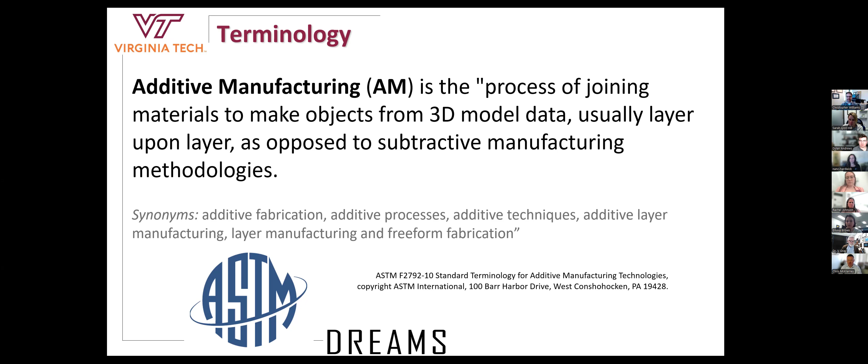And you'll notice the word additive is really critical here because it's to oppose it to subtractive manufacturing, the more conventional: I start with a giant chunk of metal and I'm going to mill or machine away. I'm going to subtract material to get to the shape I want. Whereas here, we're going to add material selectively to get to the shape that I want.

So again, in general, what all of these processes have in common is some three-dimensional model on your computer, a digital file, and we're going to slice that into layers and then lay down material layer by layer to build the object. And this is something we've been doing a long time in human history, actually, right? We've always been thinking about creating complex, contoured, three-dimensional shapes by slicing it into layers and then assembling them.

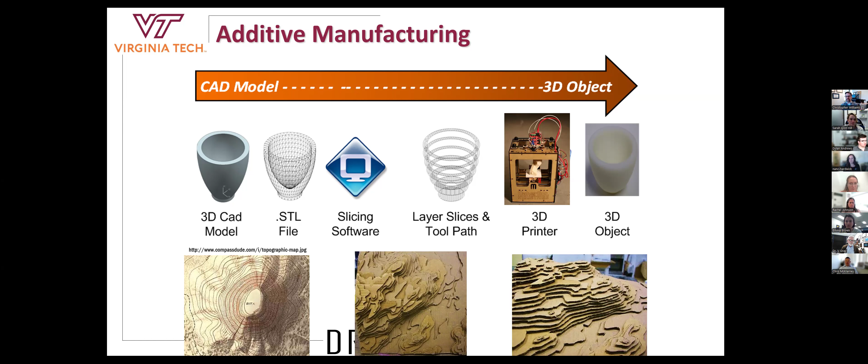So instead of doing the old cartography way, making contour maps, we've just basically replaced that with robots and shrunk the layers down to make them very fine, so we're able to create a really nice representation of three-dimensional shapes. So think about it in that context. So again, as I mentioned, we're all familiar maybe with this idea, right? I'm going to feed some plastic in through a nozzle, like a hot glue gun, and I'm going to build this object layer by layer.

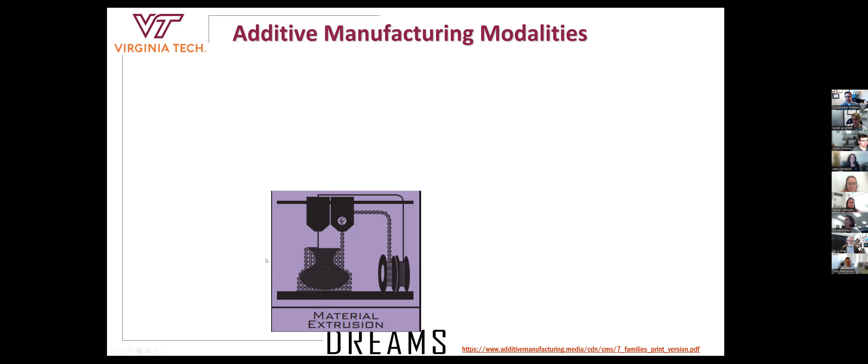But that's just one way. We call that technology material extrusion, right? I'm going to take some plastic and I'm going to extrude it selectively. And we should mention, by the way, that in that phrase, extrusion, there's a whole bunch of materials. We actually have a local company in town, Blacksburg, called Cell Inc., that uses that same principle, but it's printing biocompatible materials. Think about bioprinting, extruding biologically compatible materials that can be embedded in the human body. So there's lots of different ways of that idea of extrusion.

But what you might not know is that's just one of 7 different ways of printing. So very big classifications, and there's lots of companies and lots of materials inside each one of these. And again, they have in common that they are able to form objects layer by layer. Some of them are ink jetting processes. Some of them are actually using lasers to selectively melt powder. We have other technologies that use ultraviolet light to selectively cure resins layer by layer.

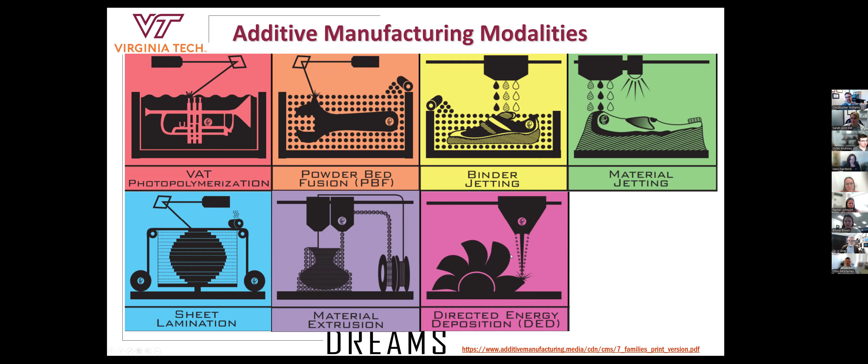And actually, another startup that we have in town uses this technology, vat photopolymerization. So Skyphos uses that technology to make very small, very precise, lab on a chip kind of devices. So this technology is not just about making Yodas about yay big, but they can make things very, very small. But because of our guests here, we're going to be focusing today a lot on directed energy deposition technology, which is about making metal components at very large scales very quickly.

So let me tell you a little about one quick other technology, just to give you an idea of other ways that we print: this idea of using lasers to selectively melt powder. And we have a technology like this on campus. And it's probably one of the most commercially adopted metal technologies.

This is a quick video of them using a laser to selectively melt metal powder. And you can sort of see that transition from a powder state to a molten state. And then when it's done scanning that layer, it will push powder across to recoat a layer on. And then they'll selectively scan again, and that will melt that area of the layer, but it melts into the previous layer.

And at the end, you're almost like an archaeologist. You have to dig through the powder to get your final part. And believe it or not, many of you have flown on commercial aircraft with some components made from this technology. Every SpaceX rocket that you've seen go to space uses printed engines.

We're seeing a lot of adoption, not just in aerospace, but even a lot of medical implants. Some of you might have friends who've had a spine implant or a knee implant that has been printed with this technology, right? So it's not just plastic trinkets, it's actually also high-end polymers and high-end materials, but also metal components.

So just to give you a flavor for other technologies. Again, as I mentioned, we're going to focus a lot today on directed energy deposition, which is this idea of directly adding material selectively. And one of the technologies we'll talk about is this opportunity. Imagine just taking a welder, attaching it to a robot, but instead of just doing one line of a weld, actually stacking the welds layer by layer and building big metal parts out of that.

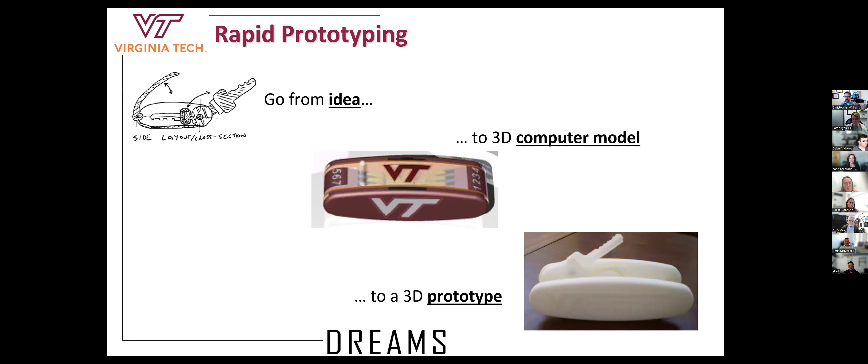So the original idea, and still a very big use of these technologies, is I have some sort of idea. I don't want to invest the time and money and tooling required to make that idea, but instead I want to go to a computer model and then hit print, right, and get a plastic version, a quick prototype, right? And it allows me to iterate through my ideas much quicker, or I can bring them to my customers and show them a model and say, yes, we all sign off on this idea. So it helps with communication aids as well. Again, a very great use of the technology.

But then what we're starting to see is people starting to do more functional uses of these systems. So one of the big ideas is maybe I still am going to use traditional manufacturing to make my product, but I have a lot of tricky operations. I have to do assembly, so I have to sort of jig and fixture everything in place, or I have to do very careful inspection. And I don't want to use my manufacturing tools to create these custom odd-shaped fixtures. I can use this technology to design and quickly make those kinds of jigs and fixtures to hold my parts in place during assembly or inspection, or to aid in traditional manufacturing. So that's another big use case we see in this industry.

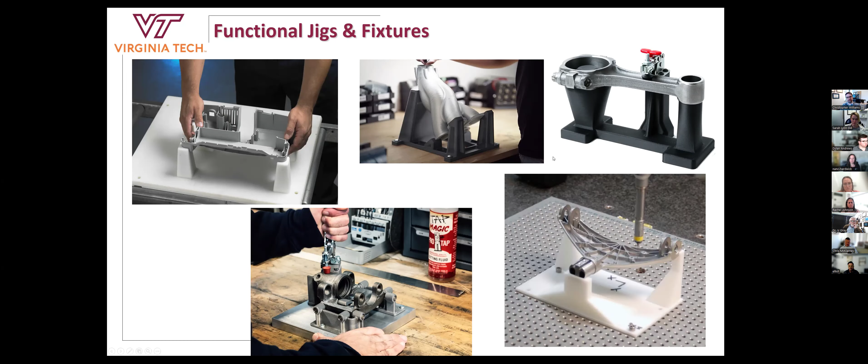And again, every single one of these is made with a different technology. Maybe some of them are made out of metal, some of them are made of polymer, some of them are made out of composites. Each one has its own pros and cons, and that's something we as a community can work together to help with.

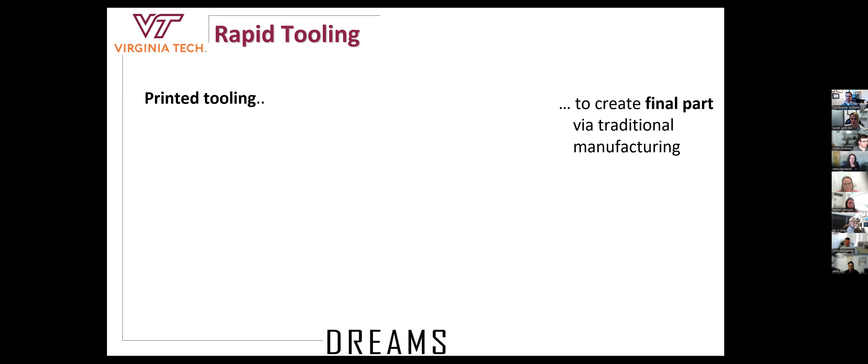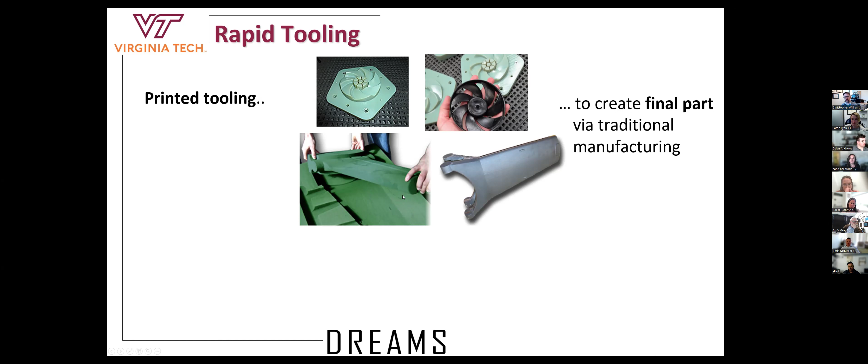The other sort of evolution of the technology is what we refer to as rapid tooling, where we're going to actually print a tool and then use that in traditional manufacturing to make the part. So we're not making the part, we're just making the tooling and fixturing to finish that. So we might be able to make, for example, a short run injection mold using a polymer additive manufacturing process. So we're just making the mold and then inject plastic to make the final part. There are even technologies that allow you to directly print sand and use it in traditional sand casting. If you don't want to make the patterns and tools, you actually can print the mold directly.

And there are even large-scale polymer additive manufacturing technologies that are being used to print very, very large molds, like this wind turbine blade mold, that they can then use to do conventional carbon fiber or glass fiber layup to make wind turbine blades or other very large-scale aerostructures. So additive manufacturing is not just something that fits on your desk, it's something that fits in half your factory, right? It's very large systems that allow for the manufacture of very large objects.

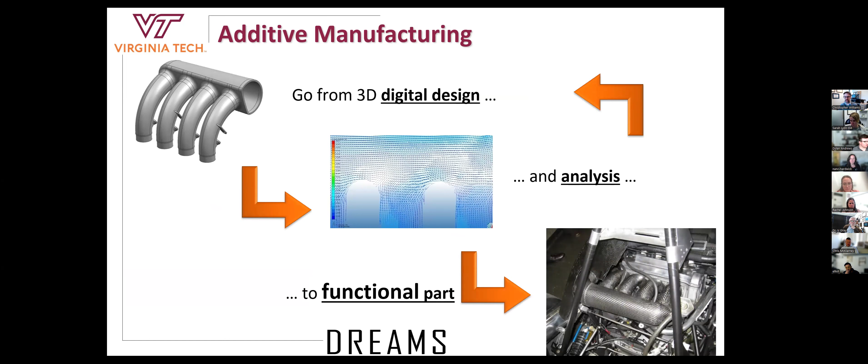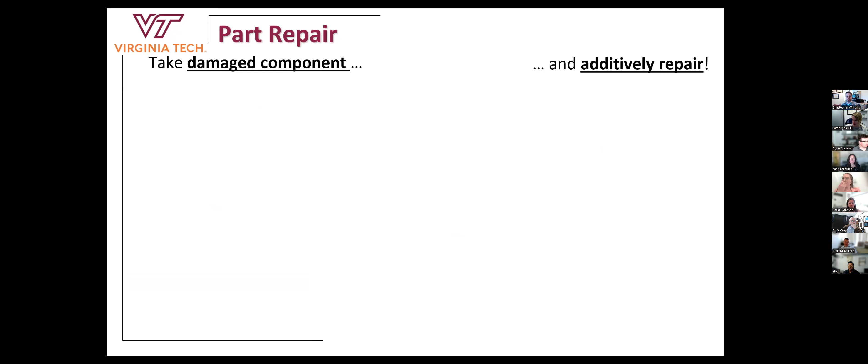The last thing that might surprise you is that these technologies, specifically these directed energy deposition technologies, are really unique in that they're also able to repair parts. So it's not just about making an object from nothing. You could actually bring an existing object into your printer and deposit material to repair holes or other damage.

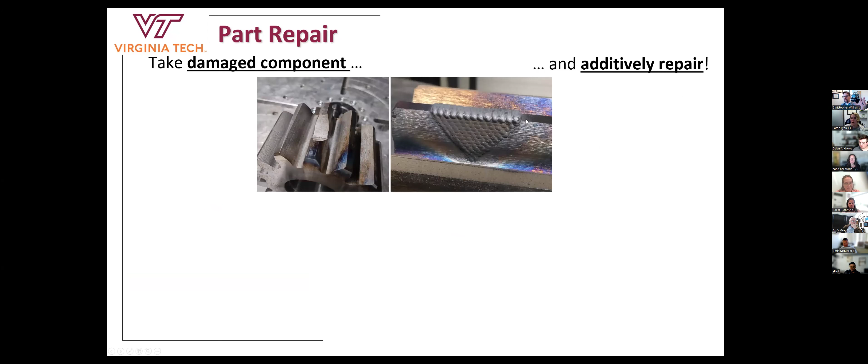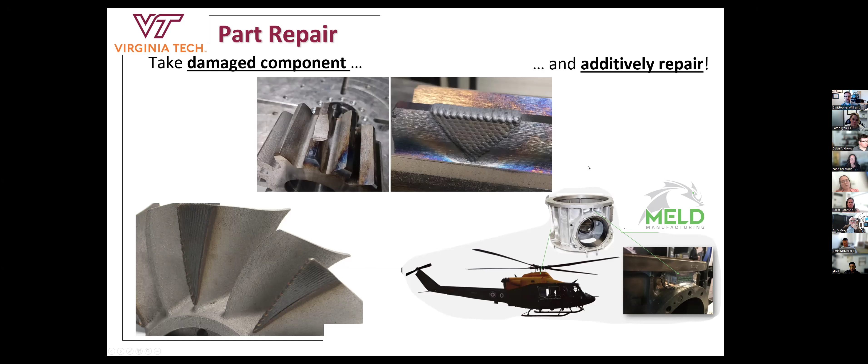So for example, I might have this toothed gear here, and I can actually go in with a directed energy deposition system and selectively weld in and add material, and then take it to my machine shop to remove material. Or again, re-tip turbine blades, for another example. And maybe Nanci will share some of her company's work in repairing aircraft components that otherwise, with that damage, would have to be thrown away and started from scratch. And here we're able to just directly use that technology to add material.

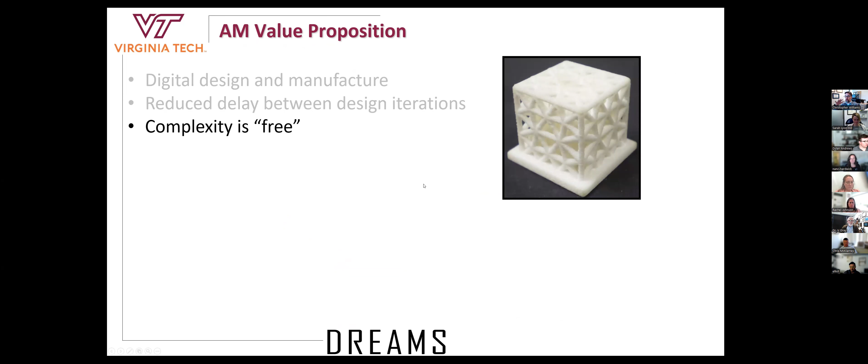So what are the value propositions? I think this is a good opportunity to let Nanci and Alan, so I'll just run through these. The bottom line here is we have an opportunity with this technology to digitally design and manufacture objects, which allows us to reduce the delays between new ideas. Complexity is not necessarily free, but we're able to make much more complex and lightweight components than traditional manufacturing processes allow, because we're able to grow parts and not have to reach in and subtract and mill away.

We're able to make lots of parts in a single print that are all unique. And some of your friends might have custom-made hearing aids. Almost all the hearing aids now in production are 3D printed, right? Because each ear canal is unique. Some of you might have the Invisalign orthodontics. Those are also printed components.

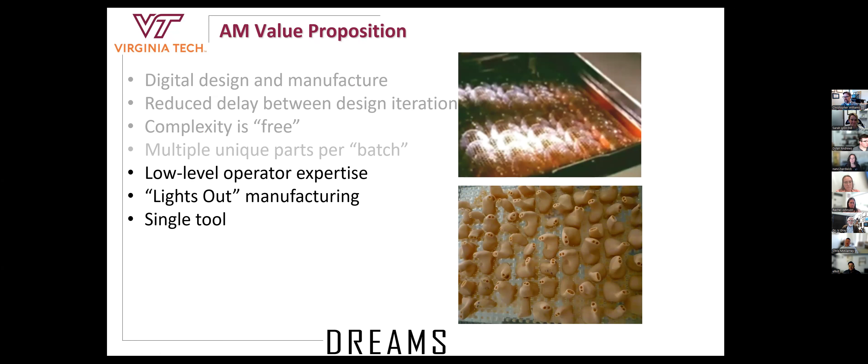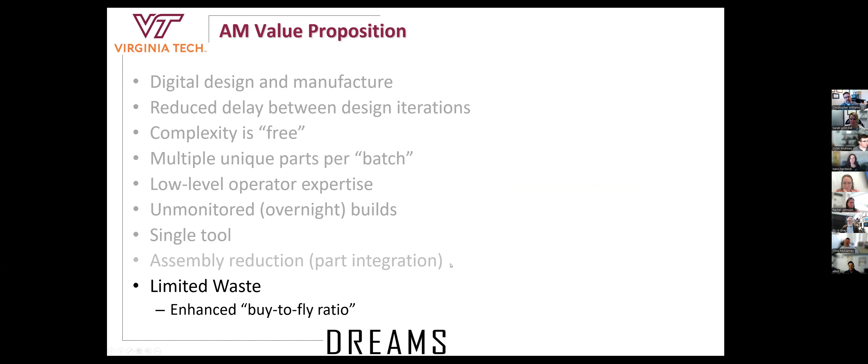And this idea that we don't have to delay manufacturing, it's very agile. We have a single tool to make almost any shape, and that saves a lot in production time and training. And one of the really nice things, it also reduces assembly, because that complexity allows us to make a single part where maybe we had to make several components and then assemble them together. And one of the things that we're excited about is limited waste.

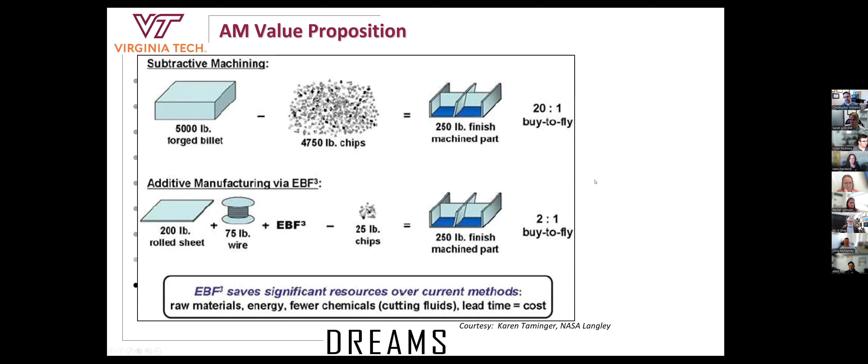So, if I were to take a traditional part that I would like to achieve, this part over here, traditionally I would take a giant block of metal and waste almost a 20-to-1 ratio of the raw materials on the floor to get to the shape I want. Whereas in additive, we're able to get a much better buy-to-fly ratio, meaning the amount of material I purchase actually ends up on the part instead of just waste on the floor.

And I think what you're going to hear from Alan and Nanci is that what we're really seeing right now, especially in the world of large-scale metal additive manufacturing, is that there's a lot of demand for large parts that are traditionally made through castings and forgings, and there's a huge supply chain limitation there. And now their technologies are providing answers to address that.

So with that, I'm going to skip my last slides and just pass on to, I'm going to keep calling them our assets, our key partners in our region who are really leading the industry with their representative technologies and services. So we're really fortunate to have Nanci Hardwick, who's the CEO of MELD Manufacturing, which is what we would call an original equipment manufacturer, someone who actually manufactures manufacturing machines.

And we have Alan Pearce, who's CEO of FasTech, which is located in Danville. And they use existing machines to provide a service and actually design, fabricate and qualify parts and large-scale metal components. So with that, Nanci, I'd like to invite you to jump in here and tell us a little bit more about MELD and what you all are up to.

Okay, thank you very much. Let me share my screen here.

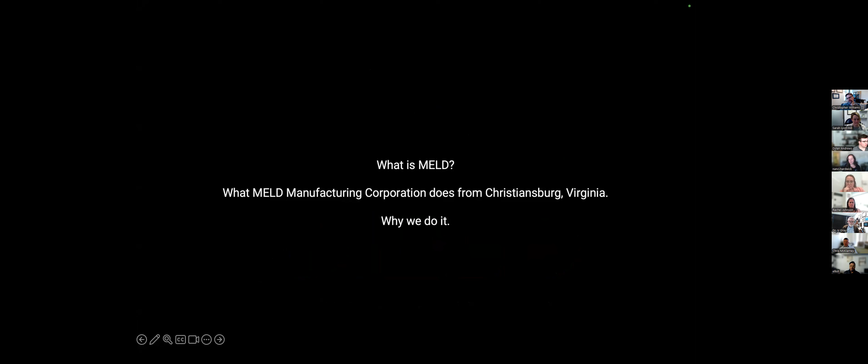I think that was a great overview. I would echo that there is a ton of variety in that additive manufacturing space. Like any manufacturing challenge, there are many tools to choose from to solve the problem at hand. The same is true in 3D printing or AM technologies. So MELD is certainly one route for AM, but there are many, and they all have advantages and unique attributes that make them appropriate for certain products. So I would be really excited to tell you about my company, MELD Manufacturing Corporation, headquartered in Christiansburg, Virginia.

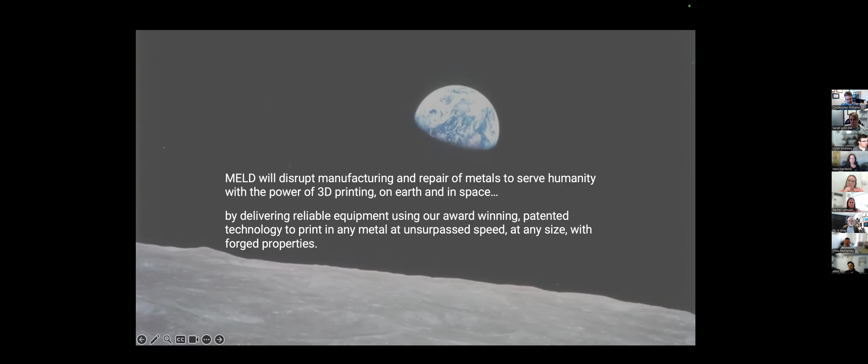Tell you about the MELD technology and why we're doing what we're doing. So let's start with the why. It is our mission to disrupt the manufacturing and repair of metals to serve humanity with the power of 3D printing, both here on Earth and in space. As Chris mentioned, we are an equipment manufacturer, so we will do this by delivering equipment using our award-winning patented technology. That technology is meant to print any metal at unsurpassed speeds, meaning very high rates, at any size with forged properties. So that's our unique value proposition.

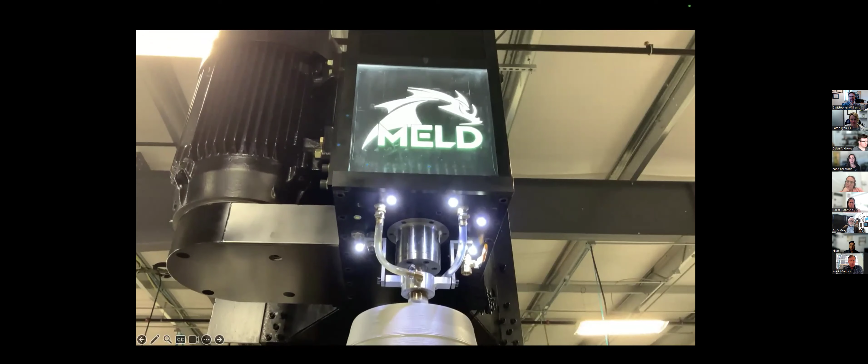I minimized the videos in this presentation in case we had some trouble with internet speeds, but I wanted to show you a part right out of the gate. This is being printed on a MELD machine here in our facility. And in case that didn't come through or you're wondering how big was that, here's me with that part. This is about 20 hours of printing and almost 300 pounds of aluminum.

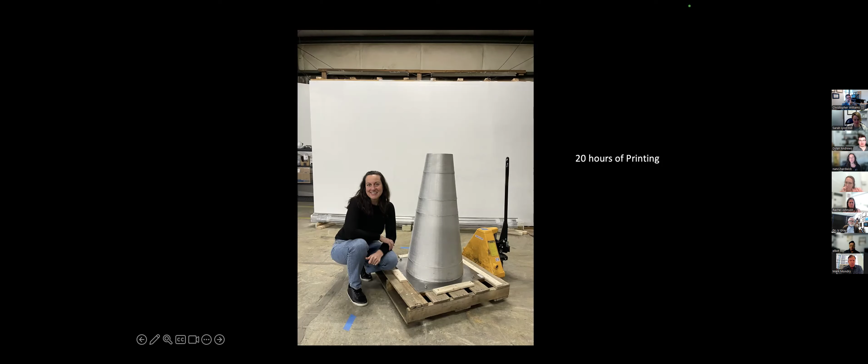I think this is a great example part to show you, to give you a sense of what MELD is capable of. We're specifically having a tremendous amount of pull from industry for large metal components that previously were manufactured from forgings. You have probably seen some of these headlines yourself, but all around the world, innovators and manufacturers are having challenges getting large components in a raw form to be able to make their products. Large metal parts, as Chris mentioned, usually come from a big block of metal that then has to be machined out, and sometimes 80% or 90% of the metal is being machined away to get to the final geometry.

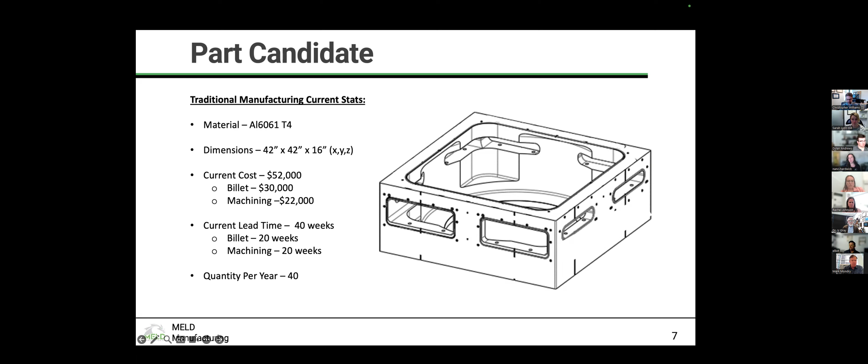This is the advantage that you will see over and over again with 3D printing. It won't always be cheaper. It is a new technology, and new technologies have a cost to them. But there are opportunities to not only save material, not only save time, but save money as well.

So what is unique about MELD? There are a few things. The technology that we have created has some unique attributes that let us print in materials that are not otherwise printable with other 3D printing technologies. We have a lot of activity in aluminum alloys. Magnesium alloys are another material that I don't think is otherwise printable. Copper, titanium—these are the materials that we have the most pull for.

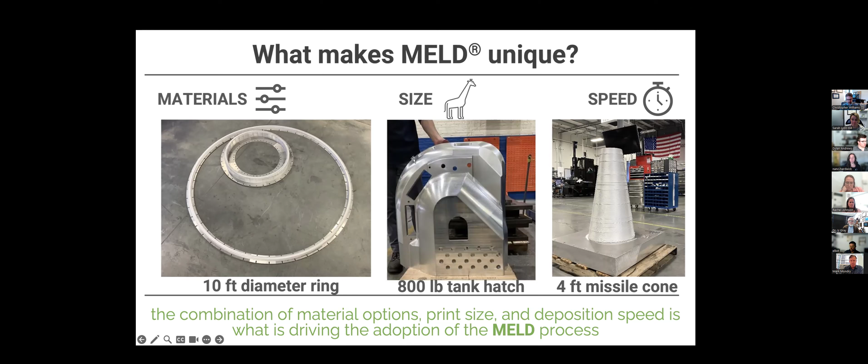The size, as you can see, there's really no limit on scale, and the speed by which we can make these parts is quite high. We have a very high deposition rate. Hopefully you can see this printing and you can tell that we're printing in just an open air environment. Because we don't have to be in a chamber, we have the ability to scale up the equipment and thus make parts that are as big as the equipment can facilitate.

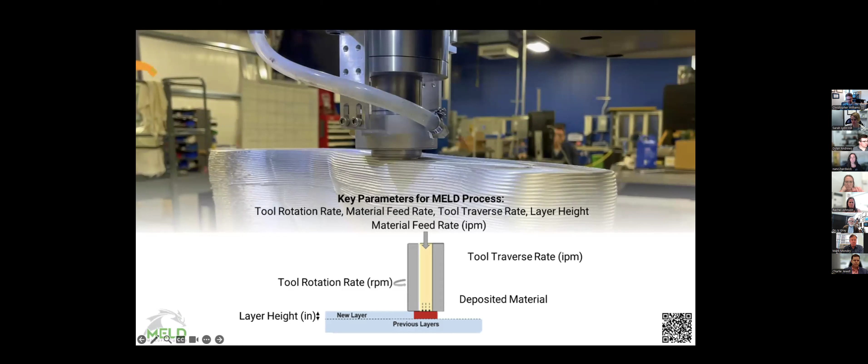There's a little bit of explanation of our process on this slide. What we're showing is the use of solid metal bars going through the machine. You can see the rotation, and we also use force to put enough energy into the material to get it to plastically deform, but we are staying below the melt temperature. This has some other benefits as well. This is essentially how we're getting to forged properties and usable material right out of the machine.

As I mentioned, this is very unique. We have over 24 patents in the US and worldwide, and I'm very proud to say that this technology was invented in Virginia, in your hometown.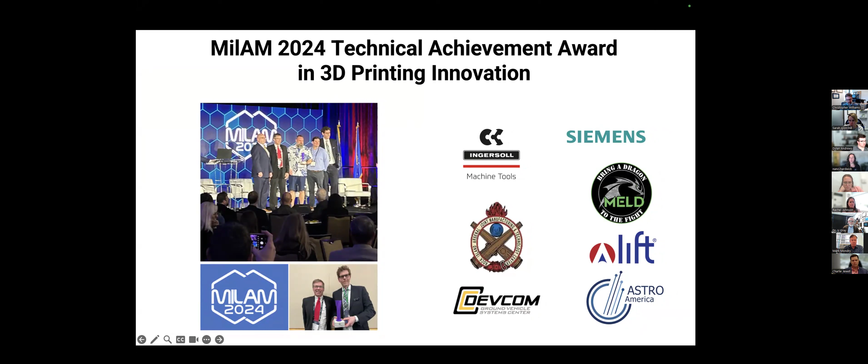We've received a lot of recognition for this technology, with a number of awards, both international and national. Just this year, we won an award at the Military Additive Manufacturing Summit for technical achievement with our partners in the U.S. Army, as well as other partners listed on this slide, for what we all believe is the creation of the world's largest 3D printer in metal, which I'll show you in just a moment.

As he said, we are an OEM. We manufacture equipment, and these are some of the machines that we offer from our facility in Christiansburg. Just to give you a sense of scale, this is our smallest machine. So you are looking at a 3D printer in this slide.

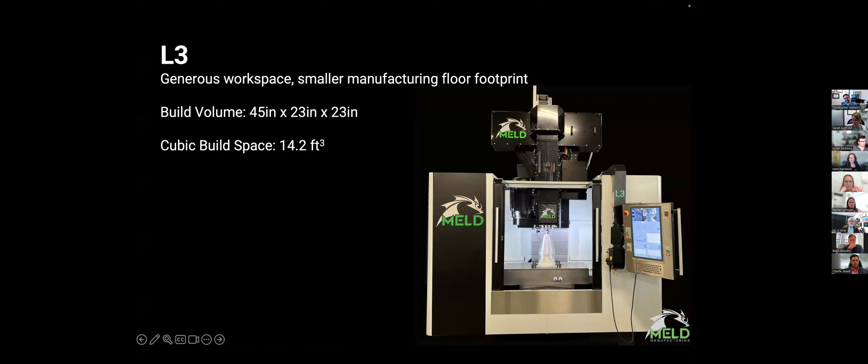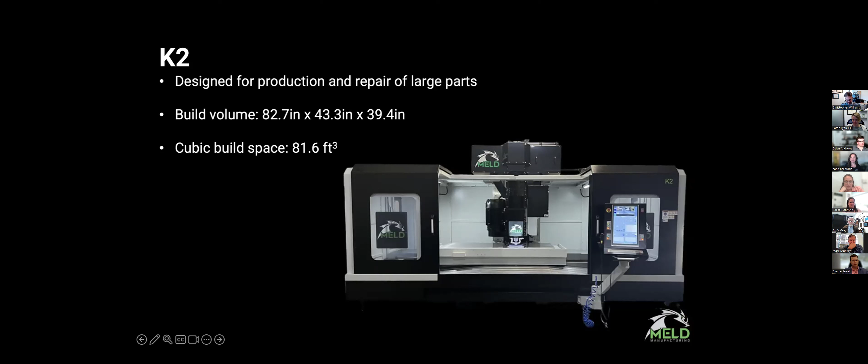And Thursday, when you come to visit, you'll be able to see this printer in action. Our L3 model—I did name my machines after droids in the Star Wars series for Star Wars fans. K2 is a bit bigger, about twice as wide and a little taller, so you get a sense of being able to print larger components.

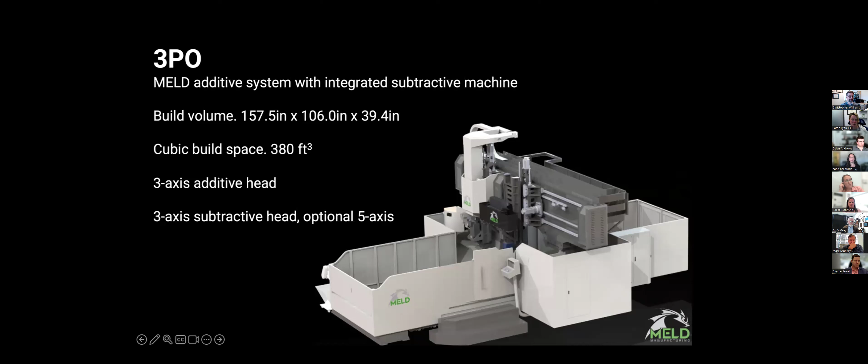And then 3PO is our first hybrid machine, meaning that the machine can both print a component and then mill or perform subtractive machining on that component. So you will be able to print and then machine down to your final geometry. This is a really large machine, the largest that we manufacture ourselves.

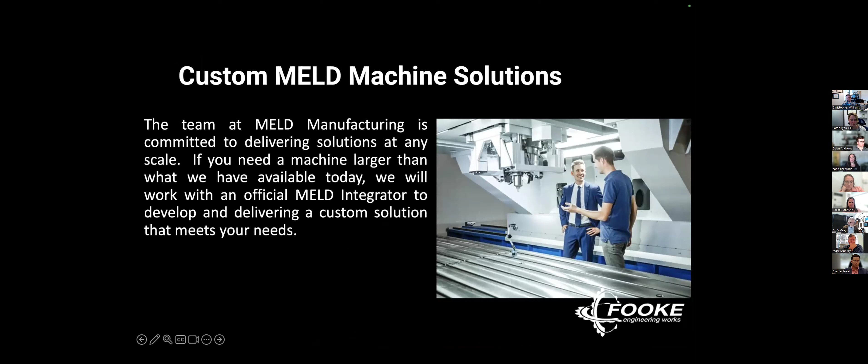However, we offer the MELD hardware as a retrofit, so that if you need a machine bigger than we can manufacture, you can work with a machine platform manufacturer to integrate the MELD equipment, which we just announced a relationship with Fooke in Germany for this purpose. So they will have a MELD product line of their own with much larger machines.

Another example of that is a machine now housed near Detroit and operated by SAE on behalf of the U.S. Army. This machine is a hybrid machine—it has MELD hardware for printing and a subtractive machining center. You can print and machine down to your final part geometry on this same machine.

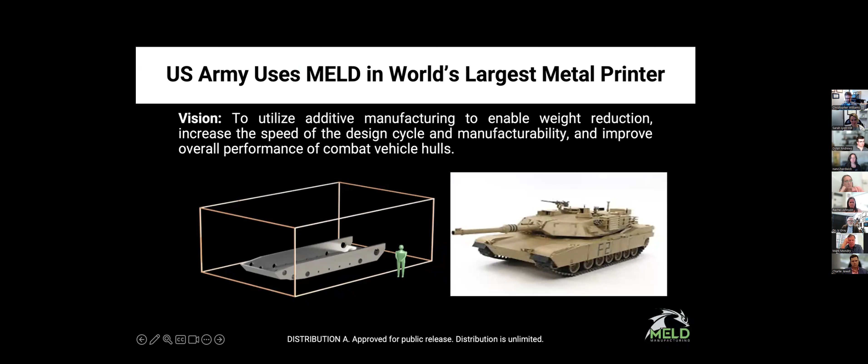Many people, the U.S. Army was the first group to put this in writing about the MELD technology, but it's something that I get to hear a lot.

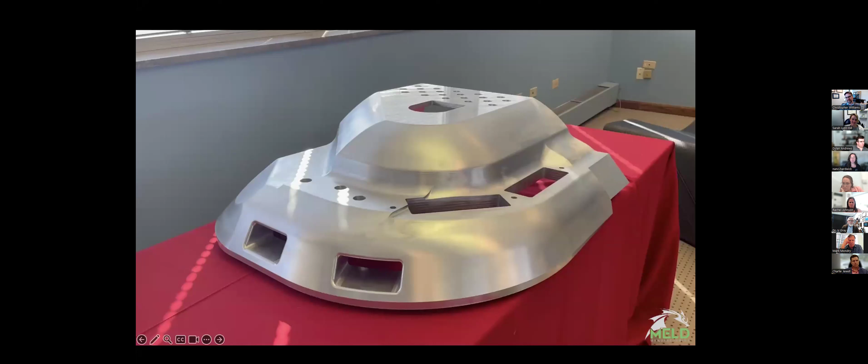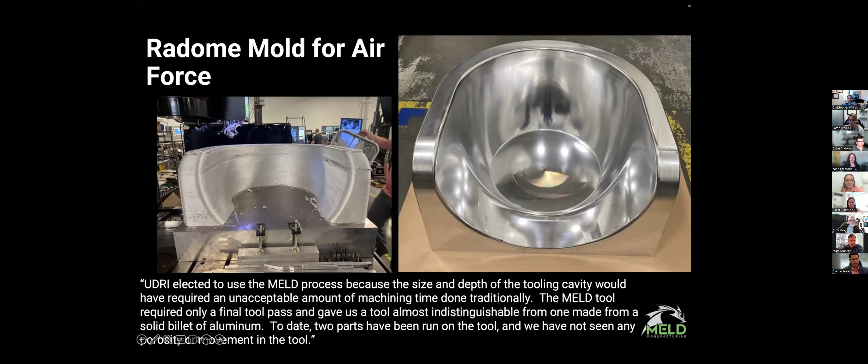I like showing this part because it shows a couple things. First, it's another example of a low rate need where time was critical. Second, you can tell the finished part came from two things: the printed material on the surface of a block of metal, and the block of metal itself. Normally this part would come from one giant block of metal, so this is a really easy way to conceptualize how we're saving material, and also how we're saving a tremendous amount of chip making or machining to get down to the final geometry.

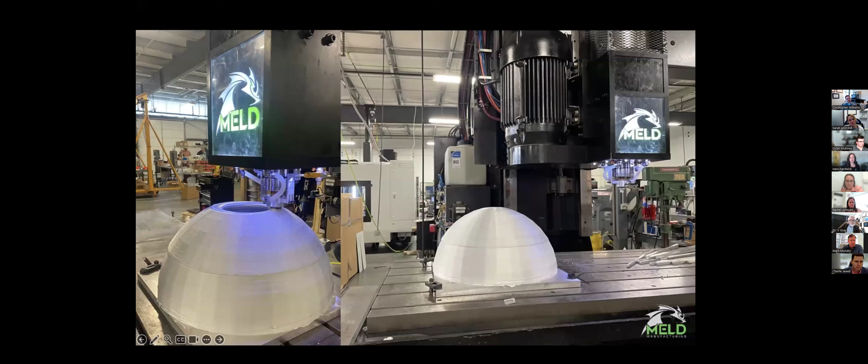We've been working with Boeing and our university partner in Tennessee on landing gear components. This is an exciting part because it's made from aluminum 7075, which is an unprintable material, except for the MELD technology. We've also been working with our space customers on components, pressure vessels and domes.

We have other activities for the Air Force, creating parts that are needed for maintenance and repair operations where there isn't an inventory and perhaps the original manufacturer doesn't exist anymore.

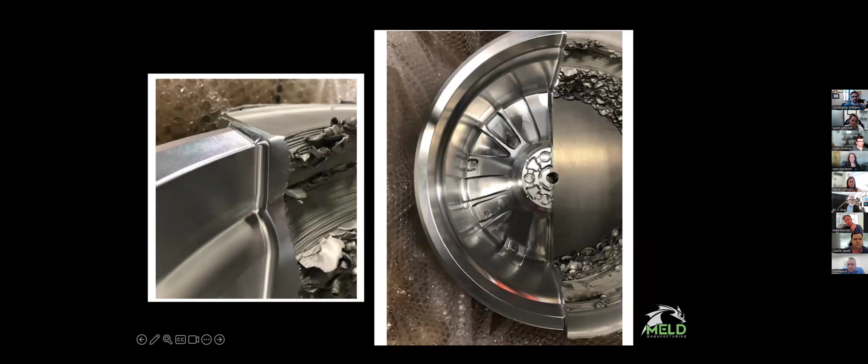I think another fun one here is for you to see how being able to use the plate that's printed on and the printed geometry can yield something very exciting. So at MELD, you'll see some fairly basic shapes being printed, but they turn into very exciting components.

Now we're looking top down at a half machined part. This is a wheel, and you can see the as-printed side on the right, and then what it looks like when the machine goes through a milling process or subtractive process to get to the final part geometry.

So a few examples without any videos of what parts look like, a very wide variety of industries coming to MELD for these parts. I showed you all 3D printed components, but Chris did mention repair.

I think it's a great way to contribute to sustainability by being able to replace, repair, recoat material in components that are worn or damaged. In the case of this magnesium gearbox housing, which is a flight critical component, there is a standard crack that occurs, and MELD was able to demonstrate that we can successfully remove the damaged material, print new material with sufficient bond strength to the part itself, and machine it to its original geometry and put it back in flight.

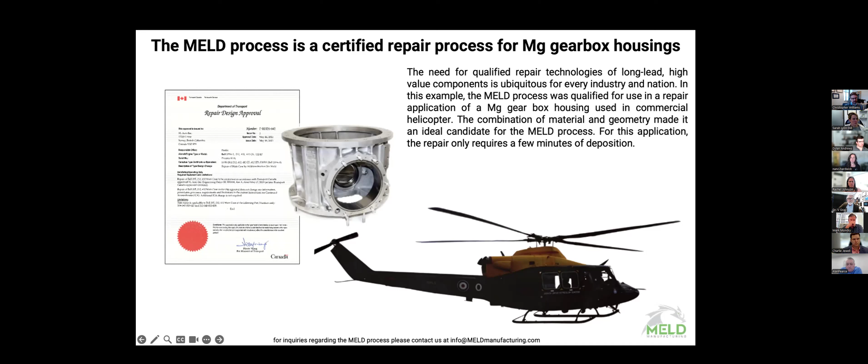I thought I would finish by just sharing some of the activities that we share with the next speaker and with Virginia Tech and others in the state of Virginia.

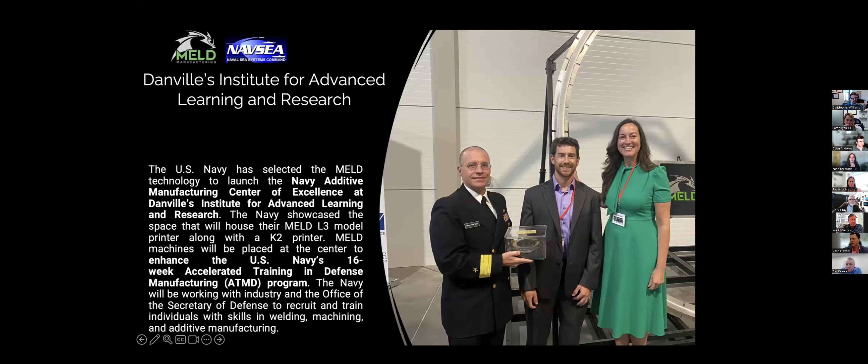We're very proud to be a part of the Navy's Center of Excellence for Additive Manufacturing in Danville, Virginia. This picture is from the ribbon cutting before there was any equipment there at all. Right behind us is a 10-foot diameter cylinder printed with the MELD technology.

We've been honored to be a part of not only providing parts for the Navy, but also for workforce development. It's a really great vision and a privilege to be a part of it.

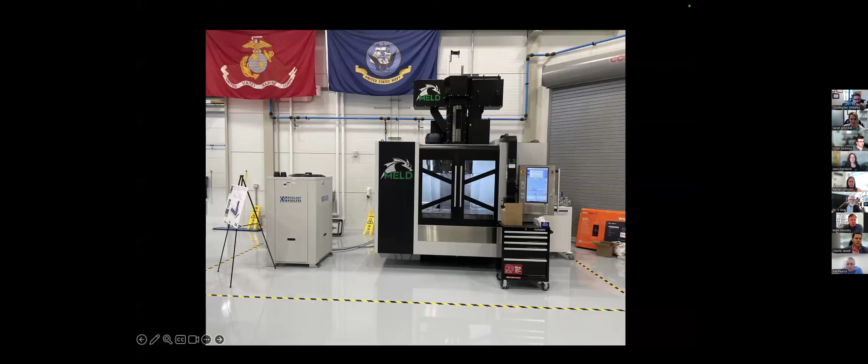Once the equipment got loaded, it looked like this. Then it was my pleasure to explain our technology to the U.S. Secretary of the Navy. So I think that's probably a great place to let Alan pick up, and I look forward to everything ahead for all of us. Thank you.

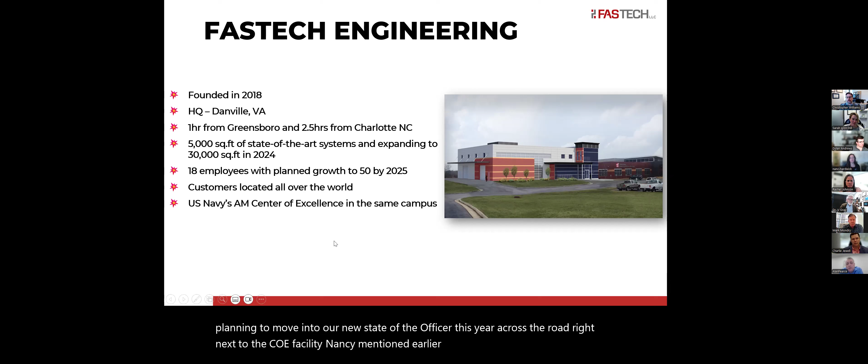So it's been a phenomenal investment, hundreds of millions into the region for training and additive manufacturing technology, investigation and expansion. For those that don't know, we're close to Greensboro and 2.5 hours from Charlotte. Our current facility is literally connected to the machining program in the cyber park in Danville. We currently employ 18 people, and our planned growth is to 50 by '25 - I think the rate's going to be more like 100. We're already planning to move into our new state-of-the-art facility across the road, right next to the COE facility Nanci mentioned earlier.

Our largest customer has become the DoD, really, between the Navy and the Army, but also a lot of aerospace clients. We're a service provider, so we use additive technology as part of a solution to print, machine, inspect, and test parts on behalf of the customer. We're a supplier that would buy, hopefully, for example, a MELD system for some of our clients and opportunities within the DoD arena. The customers we currently deal with - our largest was Siemens.

It was the first company we started with, down in Charlotte, manufacturing large gas turbine components for those guys. We also work with Collins on aerospace components, and Norfolk Space on solar power, Rolls-Royce engine parts, and so on. We just started moving into the space industry now as we've gained some traction with certain technologies.

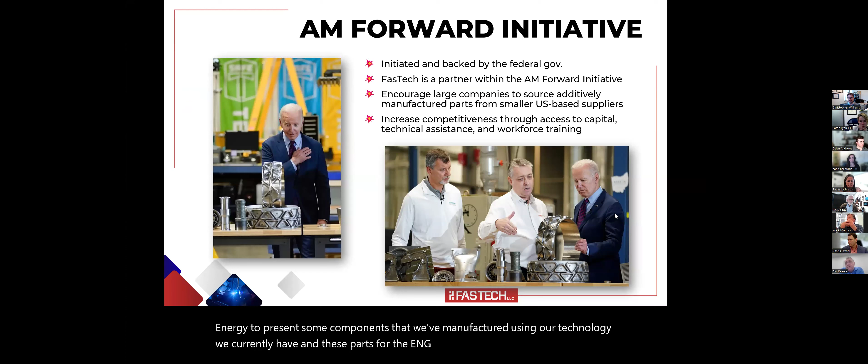That's something we're very proud of, and I think it's important for anyone that doesn't really know much about additive to understand that the federal government is behind additive manufacturing and created this AM Forward program about a year and a half ago. I was very lucky to be invited with the CEO of Siemens Energy to present some components we've manufactured using our current technology - parts for gas turbine engines.

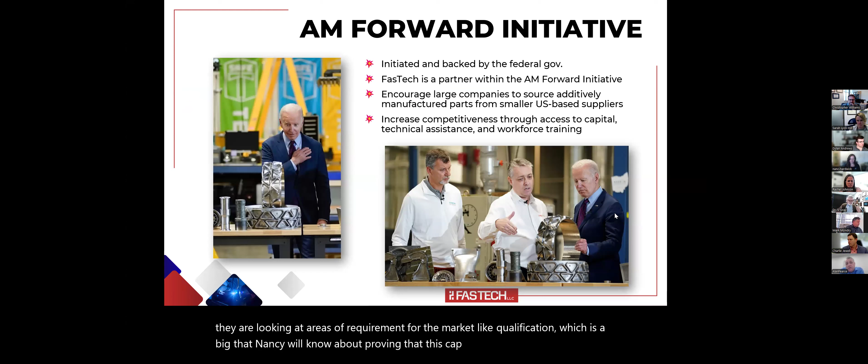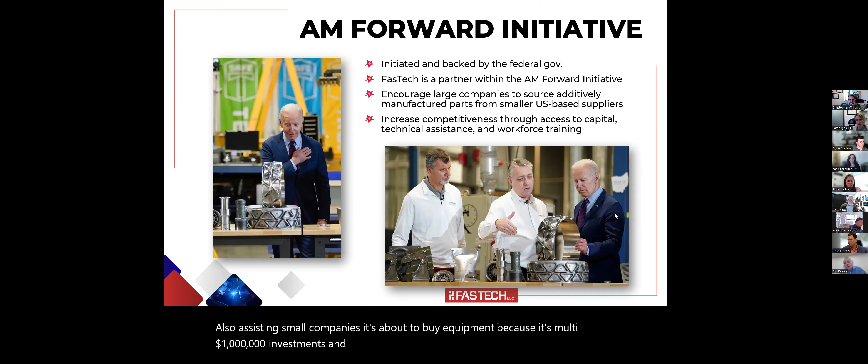The aim of the initiative is all about supporting small companies like ours to work with large companies like Siemens. They're looking at areas of requirement for the market, like qualification, which is a big headache that Nanci will know about - proving this manufacturing capability using this technology - and also assisting small companies to buy equipment, because these are multi-million-dollar investments. And the other big leg of the chair is training.

There's no point creating all this technology if no one's got the skill to actually make the parts. In Danville, the new facility for training additive welding, machining, and inspection of additive and other standard parts will create over 1,000 trainees within the next year who can come work for companies like ours and MELD, and obviously the supply chain that feeds into DoD.

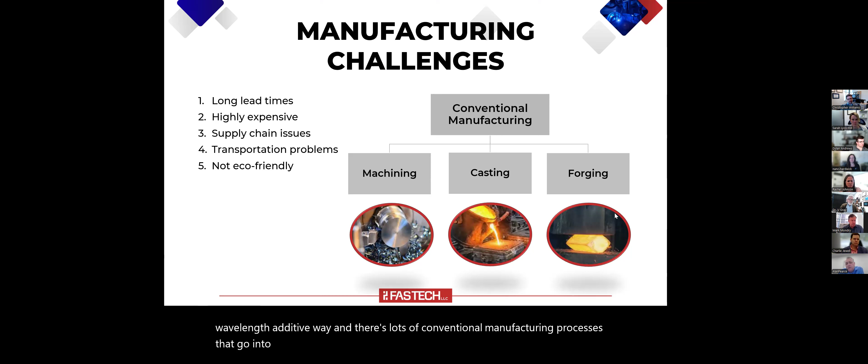We touched on earlier about the difference, and Chris did a good job covering that - so what's the difference between standard ways of making stuff and our additive way? There's lots of conventional manufacturing processes that go into making a component. If we look at this picture, you'll see all these different processes typically used to make a single part in a conventional process, and we take that down to three: using wire, a machine for actually printing, and a machine to maybe post-process or finish the part.

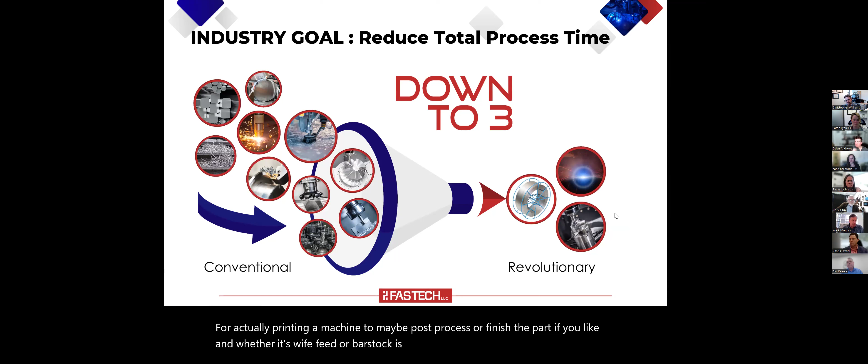Whether it's wire feed or bar stock as MELD use, the principle is it's easy to buy off-the-shelf material globally, and that makes such a difference to the supply chain issues that are common all over the world now, but particularly in the US as we start to reshore, which is good news.

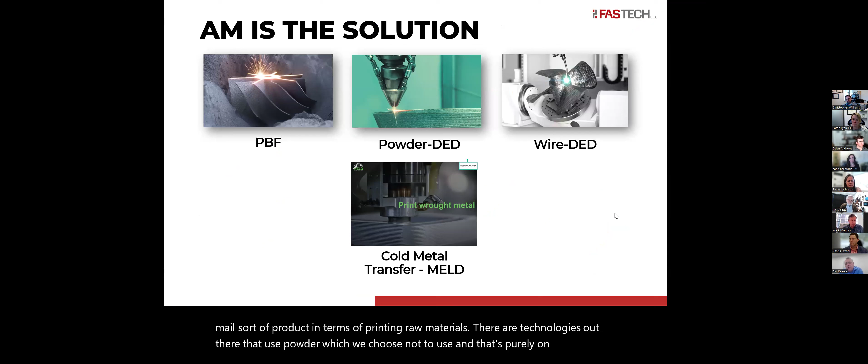The technologies we use are wire-based DED, and as you know, Nanci's covered the MELD sort of product in terms of printing raw materials. There are technologies out there that use powder, which we choose not to use, purely on the basis that we're looking to make big parts for industry, not small parts. This technology lends itself very well to that industry, such as MELD does, as Nanci showed us earlier.

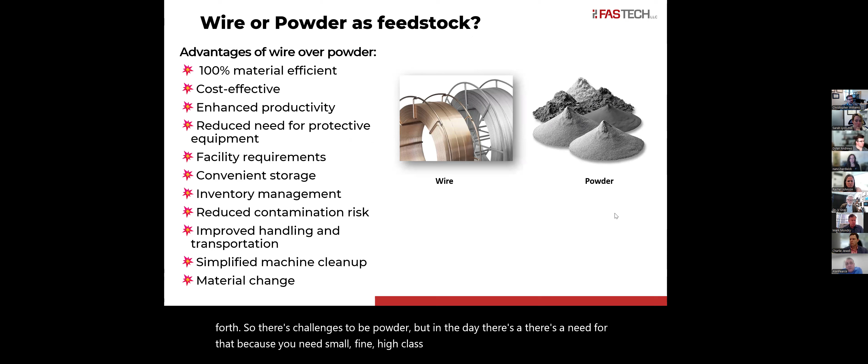So wire versus powder, why do we use wire? It's much more efficient, it's 100% efficient wire. Powder, in the process using powder, is sort of waste. There's a lot of ecological issues, and it's expensive. It reduces contamination risk and so on and so forth. So there's challenges with powder, but at the end of the day, there's a need for that because you need small, fine, high-class parts for aerospace, et cetera. So it's not a market that we've explored yet.

How does it work? In very simple terms, the customer will give us a shape or a model, as we would call it. It might be a part that they've given us that we scan. Then we'll print to that model and create a near-net shape component. Then we'll scan it, and then we'll machine the part, and it's finished. That's our workflow for the process we use within our business.

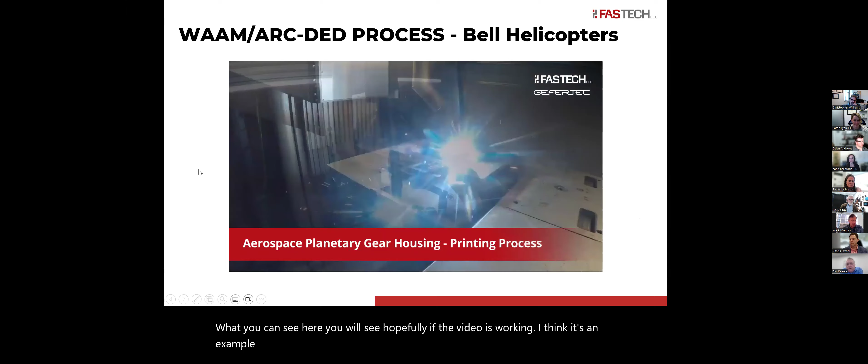What you can see here, hopefully if the video is working okay, is an example of an aerospace planetary housing—it's actually Bell Helicopters, where we're printing a large aerospace component for them. Just gives you a flavour of the definition that we'll print to.

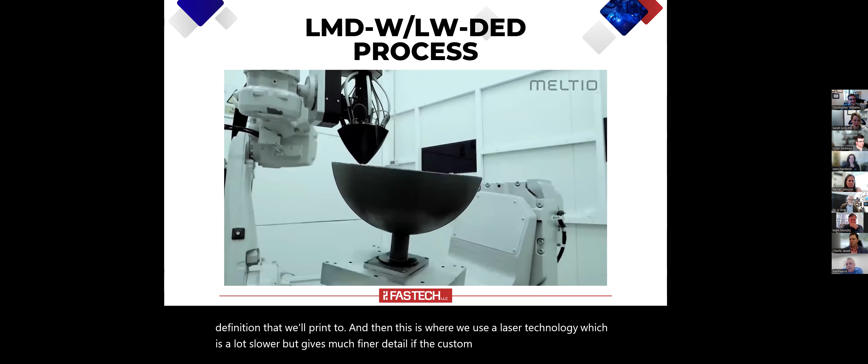This is where we use a laser technology, which is a lot slower, but gives much finer detail if the customer's looking for what would be a very near net shape—close to form, where we might not need to machine it at all, or there's very little machining, so there's a big cost saving there. So it really depends on the business and the customer requirements.

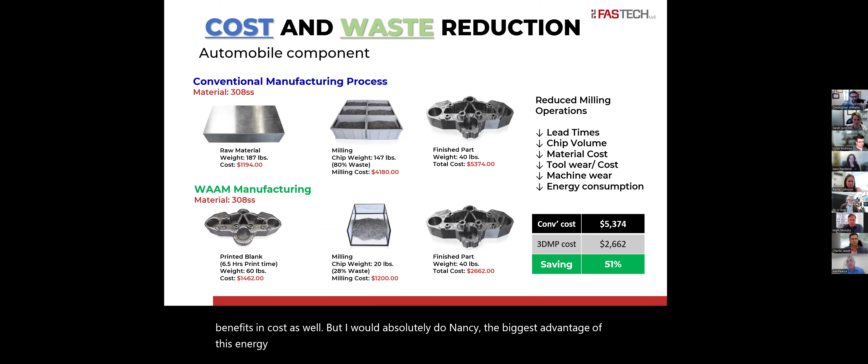But I would absolutely say, Nanci, the biggest advantage of this technology is lead time, particularly in aerospace and exotic materials where you can't freely buy them.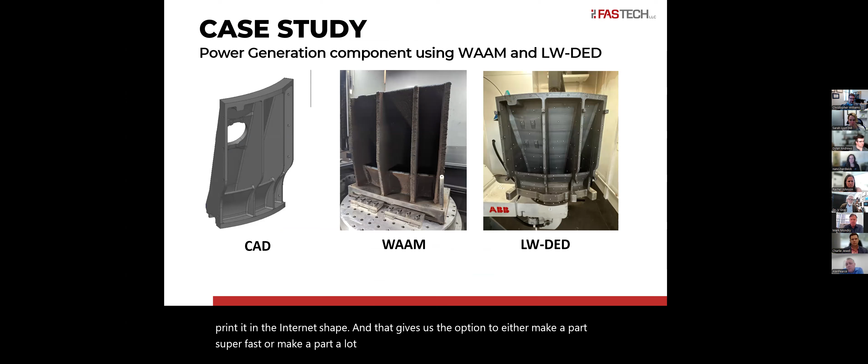This is the last part, for Siemens Energy, where we've taken the CAD and either used the WAAM technology to wire-arc print it, or used the laser technology to print it to near net shape. That gives us the option to either make a part super fast or make it a lot slower with laser, but give the customer much better definition, which is needed for some customers that require that with castings.

If you look at the process we're using here to produce that part with the arc method, you can see it's a lot slower than the MELD process that Nanci's shown you, but what you will be able to achieve is good definition.

It really depends on the kind of part that you require, which is why you need all these different technologies. I guess we're in the medium bracket, and MELD are in the large bracket—they're like, as you can see, big as a tank. We're probably making parts that go on top of that tank, which are lighter, but not easy to machine out of a large block of material.

Then what you're going to see here is the same thing again, but using laser. A lot slower, but you can see there's a lot more definition, so it's a much finer finish on the part, and that allows us then to not have to machine or cut around all of the features on that part, which is a huge saving in time on a very large part like this.

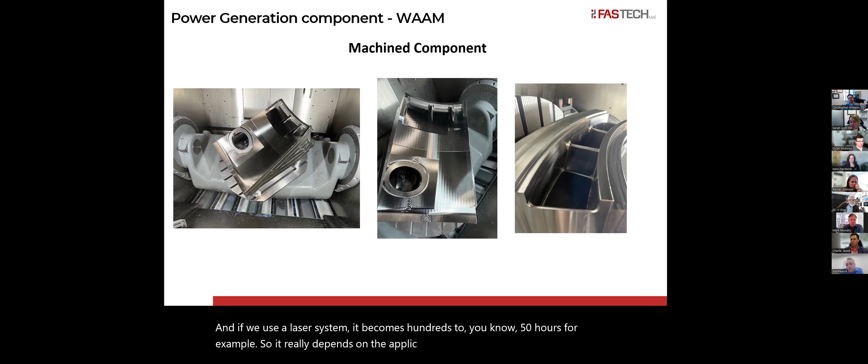When you look at the part when it's finished, you can see there's a nice shiny part there, but a lot of cost into machining that. That's hundreds of hours of machining, and if we use a laser system, it becomes hundreds to 50 hours, for example. So it really depends on the application, but both technologies do lend themselves well to our customers' needs.

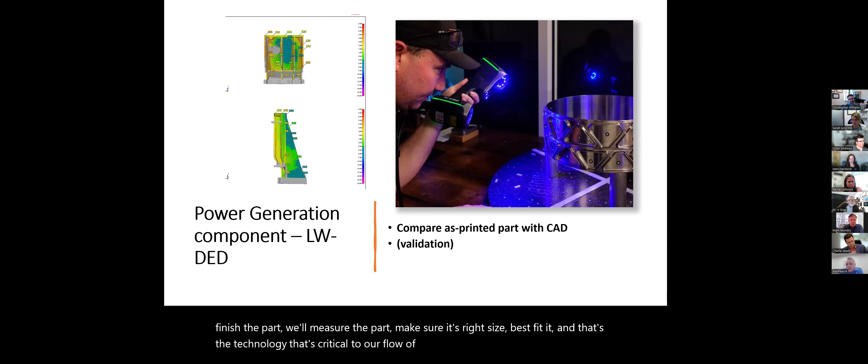Here's where we just use the technology, laser technology, for inspection. So once we finish the part, we'll measure the part, make sure it's the right size, best fit it, and that's a technology that's critical to our flow of work in our business. It's an important part of our business flow.

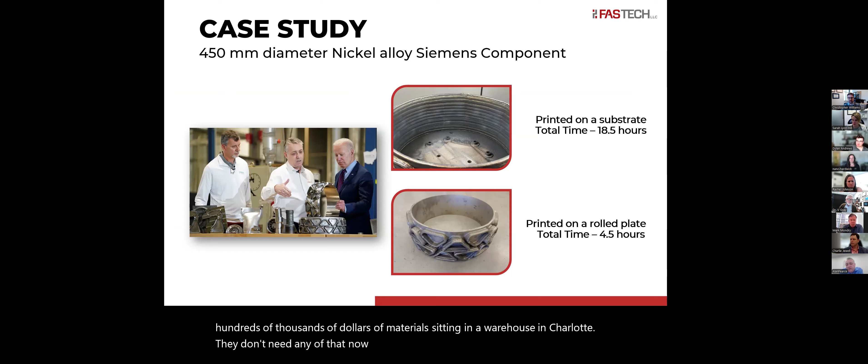So what the customer currently does is they stock over a year's worth of material. So there's hundreds of thousands of dollars of material sitting in a warehouse in Charlotte. They don't need any of that now. So there's a big saving in stock as well as everything else. And that's the part actually printing, if you can see that. And again, that's about a 4.5 hour cycle time.

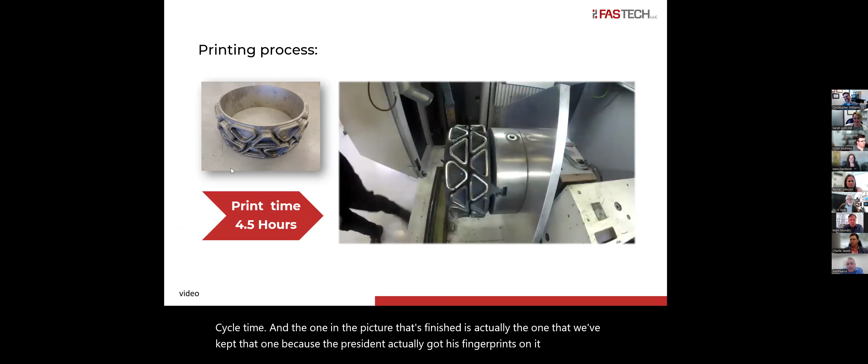And the one in the picture that's finished is actually the one that we've kept, because the president has actually got his fingerprints on it. So we're still trying to get them off so we can use it for our own secure reasons, but it hasn't worked so far.

This is just another example of a large part. I mean, it's hard to see the definition in video sometimes, but again, it's a large stainless steel part where we're looking for definition. And in that particular case, the forging, which was from Germany, was taking over a year and a half, and we were manufacturing that part in about a month, total from A to Z.

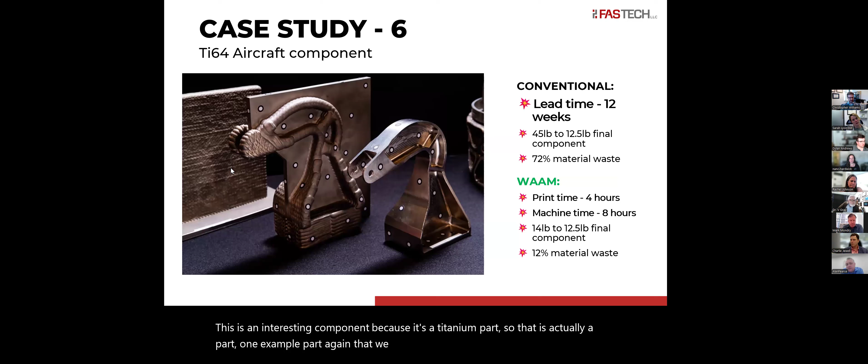I think this is an interesting component because it's a titanium part. So that is actually an example part, again, that we presented to the president, that is a really cool part. It actually is part of a Rolls-Royce engine, and it flies on the Airbus A350, the new plane program. And that is actually in flight test.

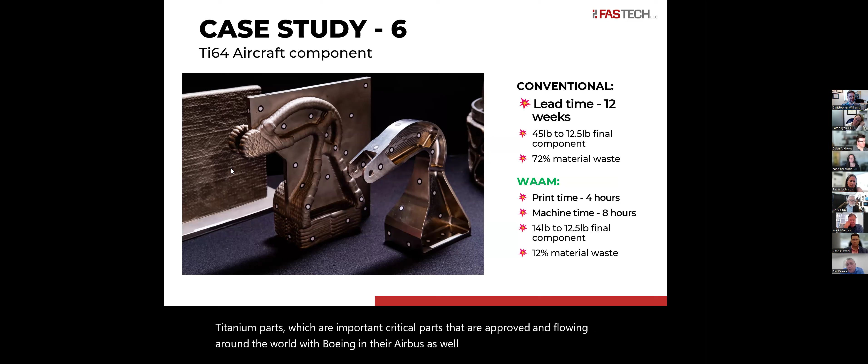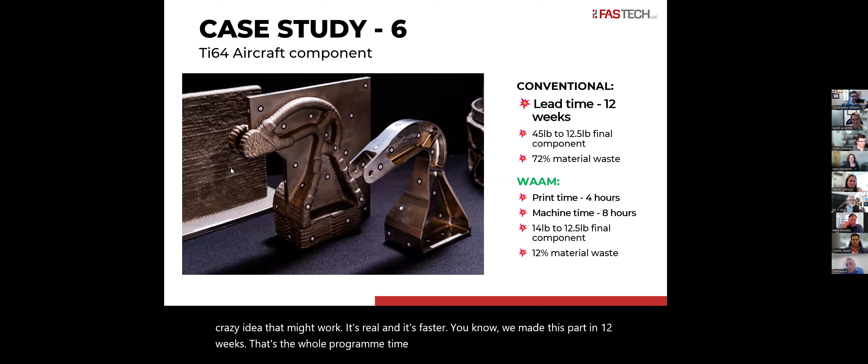So when people question this additive technology, does it really work? Well, there are parts now in planes that are flying, titanium parts, which are important, critical parts that are approved and flying around the world with Boeing and now Airbus as well. So it's not just a new fad or a crazy idea that might work. It's real, and it's faster. You know, we made this part in 12 weeks. That's the whole program time.

It would take about 9 months to manufacture that part, because as Nanci said earlier, the large blocks of material, whether they're aluminum or titanium in this case, can take many months to source. Unfortunately, a lot of it comes from China as well, which doesn't help. So we'd rather buy wire within the DFARS community, which is America and European countries. It allows us to use Western wire sources to print material, rather than having to rely on Asia or Russia for the source material, which I think is good news.

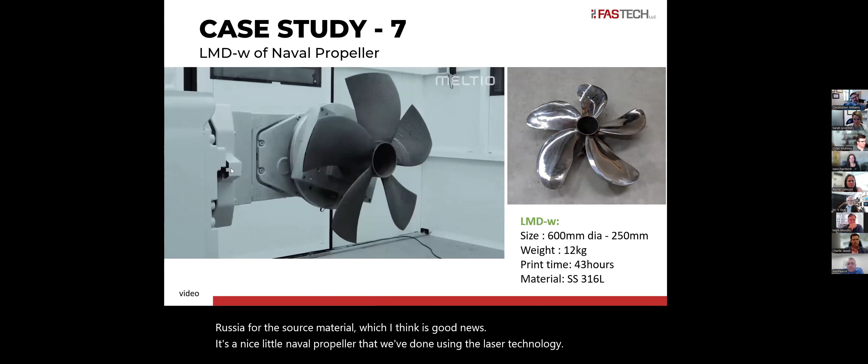Here's a nice little naval propeller that we've done using the laser technology. That's a stainless steel part, if anyone cares.

So I think in summary, we do a mix of services. I mentioned earlier, kind of an A to Z service, and as we grow, we intend to invest in qualified equipment like MELD to offer services all over the US, as well as hopefully worldwide. But you know, we're in it for the long term. I truly believe that this technology is here to stay, and it is now growing exponentially.

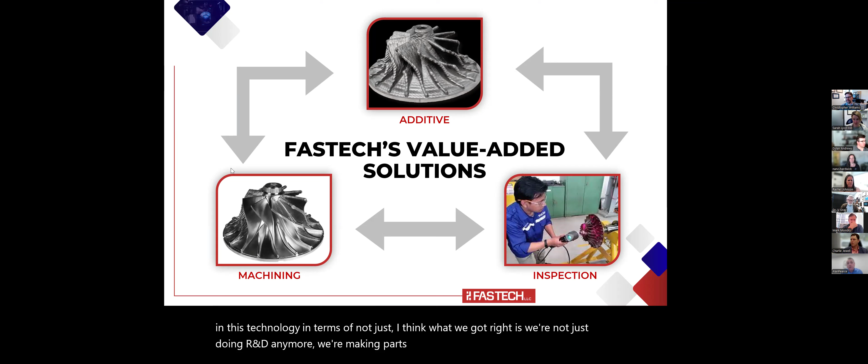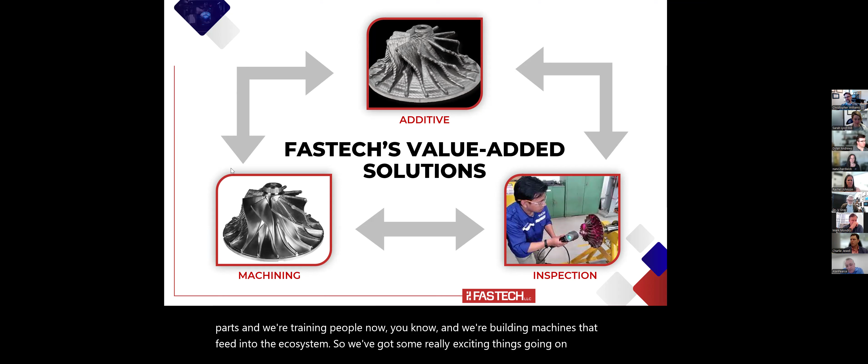So I think it's a great thing for Virginia, and I think we've got to be behind this, because we could be seen as the pioneers in this technology. What we've got right is we're not just doing R&D anymore. We're making parts. You know, we're delivering parts, and we're training people now. we're building machines that feed into the ecosystem. So we've got some really exciting things going on. And I truly believe that this project and bringing it to Virginia is a highly valued investment, and I'm right on it.

Yeah, that's awesome. Thank you, Alan. You're very welcome. And thank you, Nanci. So we know that we are running short on time. I want to give everyone a chance to ask Alan and Nanci questions you might have.

I hope the big takeaway is, maybe our first goal was to make sure everyone understood that what we all know as 3D printing has grown quite substantially. And we're seeing some real actual parts being made and manufactured here in the state, and more specifically in our region, thanks to some really key assets that we have.

As we're waiting for questions to come in the chat, Nanci and Alan, if I can ask you one quickly. This is a big question, but try to make it short because of time. We've heard from an OEM, we've heard from a service provider. Tell us a little bit more about the ecosystem that we could build as a region. What are the other needs? What are the other opportunities for all the companies and partners that we have in our region, in this space? Nanci, do you have any thoughts on that? I do. Yeah, go for it.

I am so excited about the potential for our region because of our heritage in manufacturing. This is an opportunity to take what is already a strength of our community and use that strength to propel us into the next generation of manufacturing. And as Alan said, to be pioneers. There's so much opportunity here for us, and I hope everyone got the idea from these presentations that this is just the beginning. A lot of industry pull is for existing parts made in a new way.